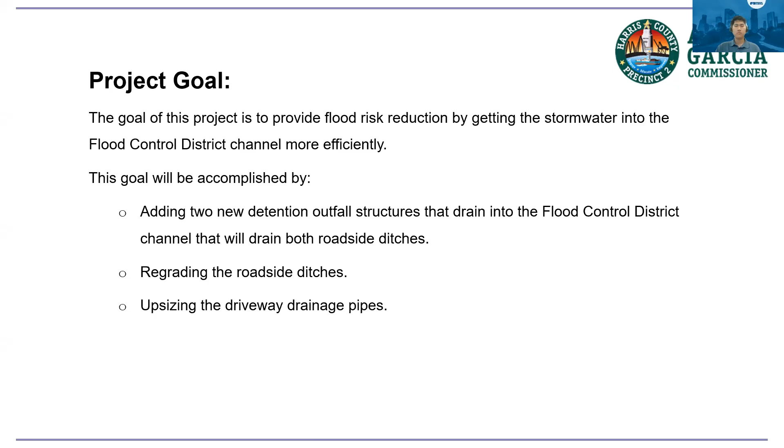This slide shows the existing flow versus the proposed flow, representing the benefits and how we're going to accomplish this. The existing ditch flow is represented by the thin red line. The proposed ditch flow is represented by the thick purple line. First thing you'll notice, the existing ditch flow only has 2 outfalls: existing outfall number 2, which is a 30-inch storm drain pipe, and existing outfall number 4, which is a channel that runs from the cul-de-sac to the flood control channel.

We'll be adding 2 new outfall structures, represented on the bottom there, added outfall number 1 and added outfall number 3. These 2 outfall structures are going to be oversized, and not only will they allow stormwater to flow through, but they will also allow stormwater to be temporarily detained to help get water out of the subdivision and into these detention structures and into the channels quicker.

The other thing you may have noticed, the stormwater on the west end of the job around FM 1942 has to travel over 1,670 feet to get to existing outfall number 2. That stormwater after construction will only have to go 950 feet. And if you notice, in all the other areas, stormwater is traveling a lot less distance to get to these outfall structures.

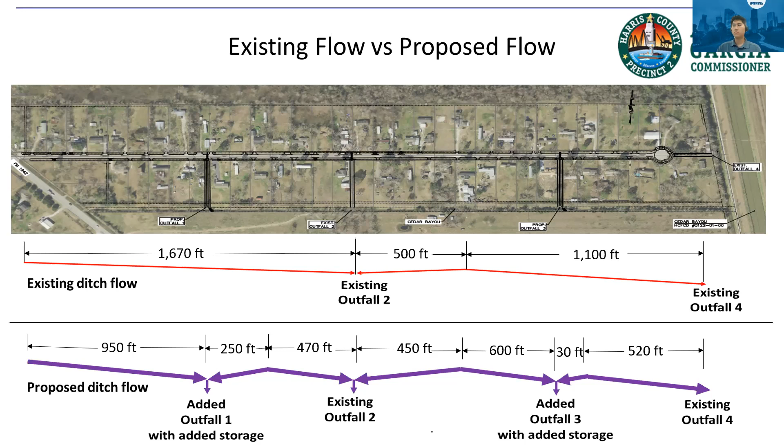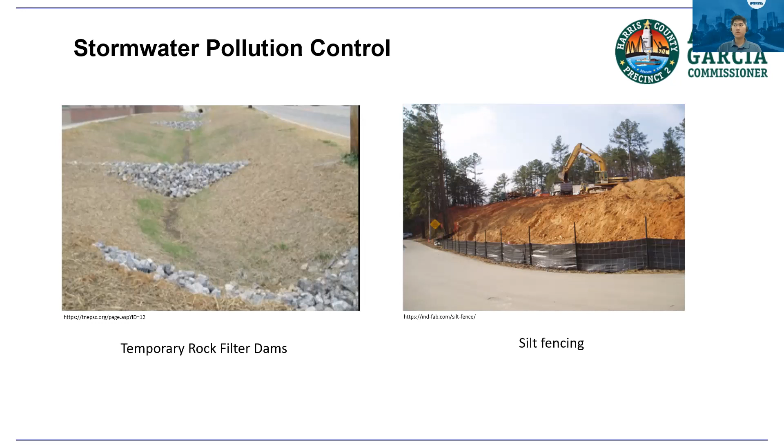Now I'm going to show you some pictures of what you can expect the construction to look like out there. Stormwater pollution control means keeping the dirt within the construction zone from washing off, plugging up the driveway culverts and plugging up the channels. We don't want that, so to minimize it we'll use temporary rock filter dams, shown in the picture on the left. These rock structures will be placed in a ditch and are only temporary. As soon as we get grass to grow, we'll pull them out. The picture on the right is silt fence, which will be used in areas to help prevent stormwater and dirt from eroding onto your property.

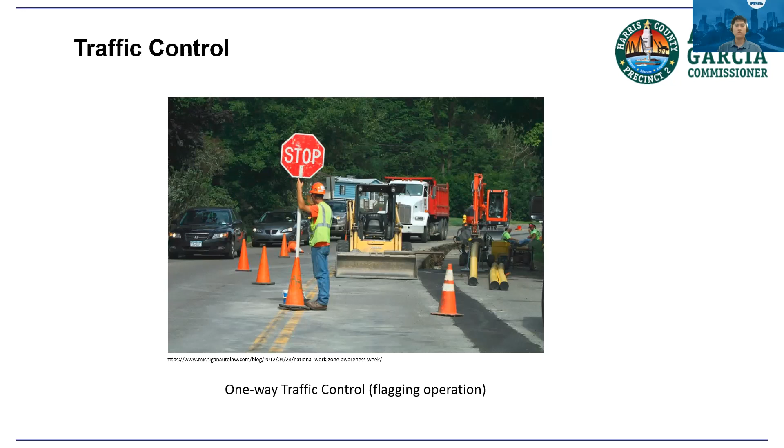This slide is an example of the one-way traffic control. This is how the contractor will manage traffic throughout the work zone. They'll have construction workers known as flaggers with stop-slow paddles directing traffic through the work zone.

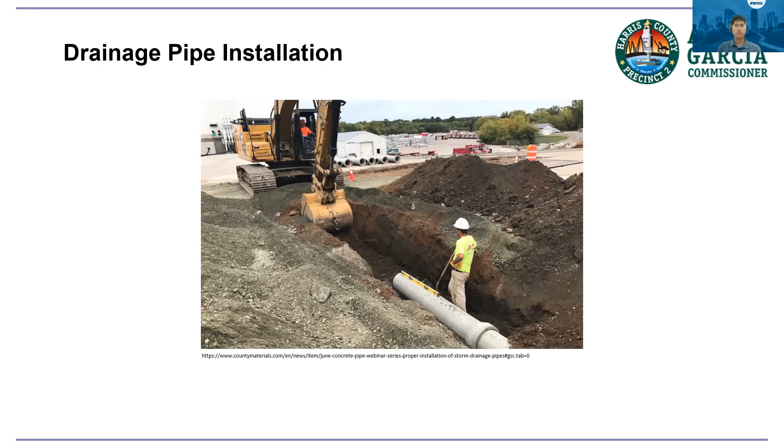This is an example of what the driveway pipes will look like. In this diagram, the bottom right shows the two new 6x3 concrete box culverts. These will be placed from the south ditch to the flood control channel on the south side of the project. Then, from that south ditch to the north ditch, we'll install three 30-inch pipes that cross underneath Apache Lane. Two of these will be at the new 6x3 outfall structures, and the third will replace the existing 24-inch pipe, upsizing it to 30 inches to allow more stormwater to leave the site.

You'll also notice that the ditches will be regraded, and we'll be upsizing the driveway culverts. Once that's finished, we will repave the driveways to the right-of-way line, represented in this picture by that fence line.

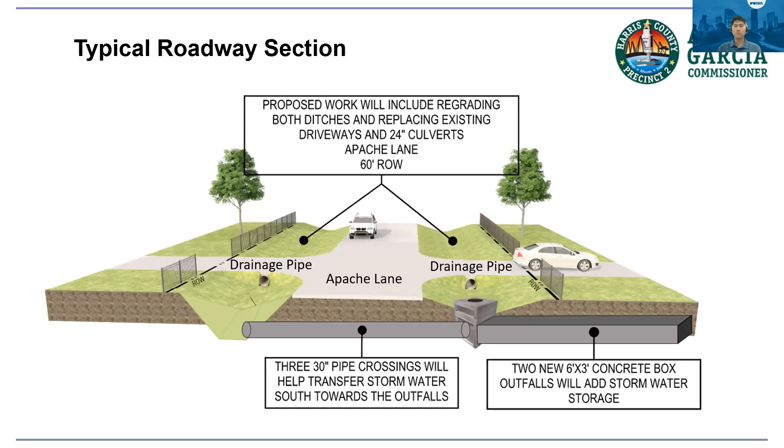The sequence of construction will start with installing stormwater pollution control, with silt fencing and rock filter dams placed out there early on. Second, we'll install the two new outfall 6x3 detention box structures, which drain from the south roadside ditch to the flood control channel. After that, the 30-inch drain pipes crossing Apache Lane will be installed, and then we'll start excavating the roadside ditches.

We'll remove and replace the driveway drainage pipes. Once that's accomplished, we'll begin repairing the driveways, replacing the driveway pavement to the right-of-way line with like material. If you have a concrete paved drive, you'll get a concrete paved drive; if your driveway is asphalt, it'll be replaced with asphalt, and likewise with gravel. The final phase is landscaping, where we'll install sod or seed to get grass to grow, followed by final cleanup before we leave the site.

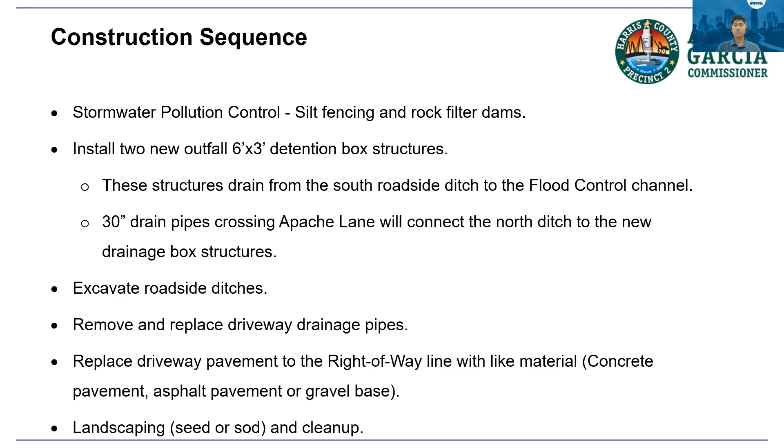You can expect construction to be completed within 6 months on this project. Expect to hear construction noise between 7 a.m. and 6 p.m. during work days.

Items located within the right-of-way will be relocated temporarily. For example, mailboxes: the contractor will remove your mailbox, put it on a temporary stand, and place it away from where he's working. You'll always have access to your mailbox. Any personal property within the right-of-way will be removed and placed on your property to allow construction to proceed.

Dump trucks and other construction trucks have to turn around within this subdivision, since there's only one way in and one way out. So please, when you see a truck turning around, stay away from them and give them space to get turned around.

Your driveway access will be coordinated during construction by the contractor. There are two times when the contractor will need to work through your driveway: when installing the storm drain pipe, and when doing the final pavement of your driveway. Again, the contractor will coordinate with you to provide access at all times.

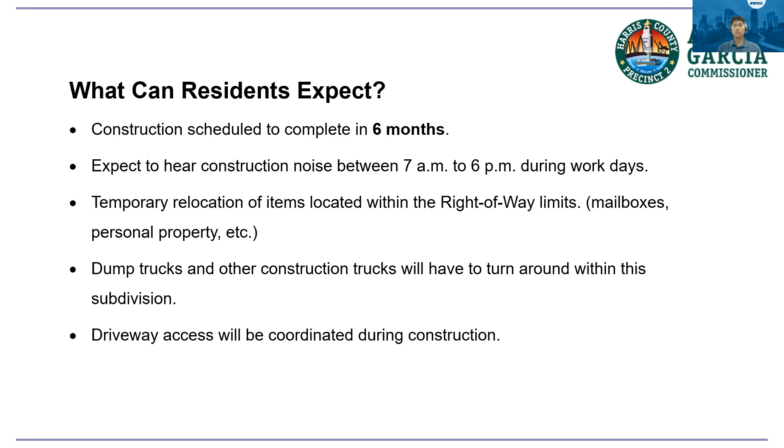You can expect construction equipment to be parked alongside the roadway, along with drainage pipes and other materials stored there. Two-way traffic through this subdivision will be reduced to one lane during construction activities, but at night it will always be returned to two-way traffic.

Please drive slowly around construction activities. We don't want any accidents out there. And please do not park on the street in areas under construction, as this will only slow down the contractor from getting the project completed quickly. We want that contractor in and out as quickly as possible.

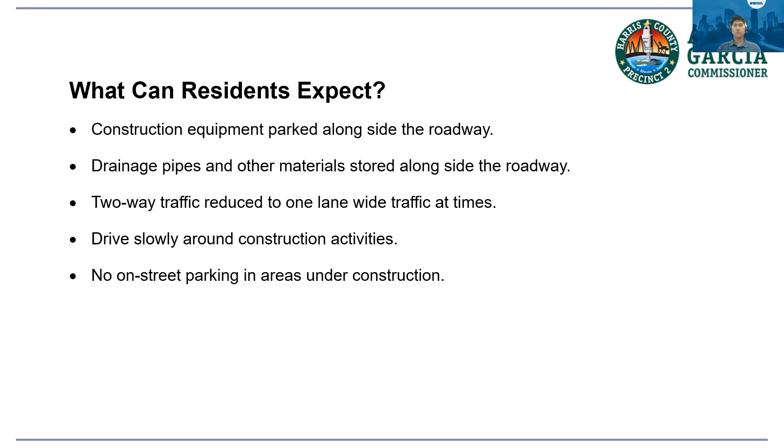During Hurricane Harvey, 34 homes in this subdivision were flooded. During Imelda, there were no homes flooded.

So the benefits to the community: we're going to provide flood risk reduction by getting the stormwater to the flood control district channels more efficiently and quicker. We're going to reduce ponding of stormwater in roadside ditches and on your property. The computer flood risk simulations show 34 homes benefited from these project improvements through water surface elevation reduction.

The construction management team contacts are as follows. Myself, I am the project construction manager, representing DGI Engineering Consulting. My on-site representative, the resident inspector, will be Kusam Mandi. The contractor building the project will be Marcon Services, and their on-site superintendent will be Mario Barreal.

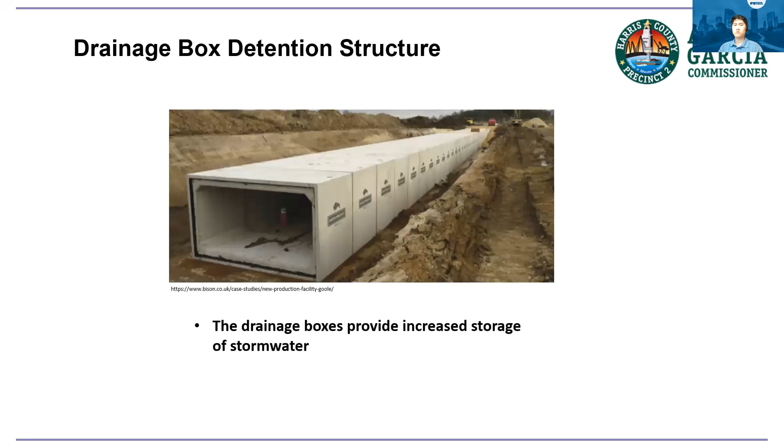Follow-up question: when you start on the ditches, which end will you start? I believe that answered that in the last response.